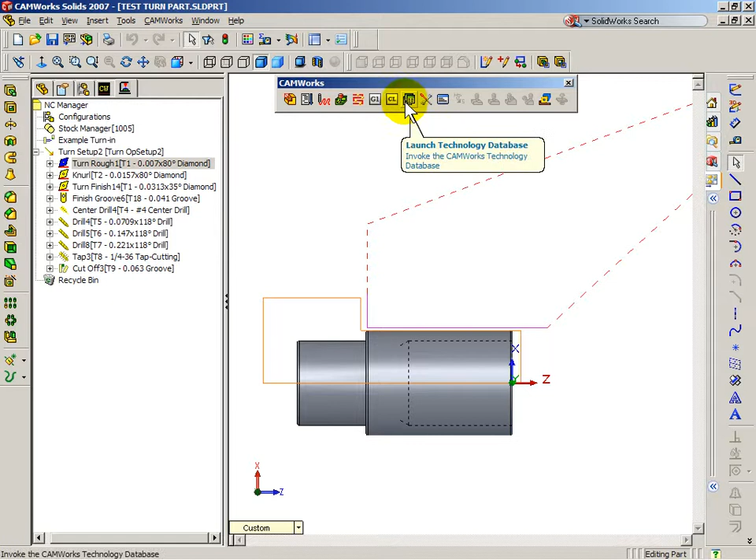The Techdb can be accessed through this icon, or you can go to the CAMWorks pull down, go on the technology database. Once we get to the technology database, we want to go to the tooling button, click on turn tooling. In the turn tooling, we have the ability to create our own inserts, our own holders.

Once we create an insert and define a holder, we can assemble them by using turn tool assemblies, which make up a turning tool. Once you make up a turning tool, you can add the turning tool to a tool crib. First, we will add an insert. So we're going to click on the insert and go to the trigon inserts.

Here's the tool page for a trigon insert. In reality, all we need to know is what is the inscribed circle and what is the radius. And we can give it a comment. In order to create one, we click on the asterisk and we type in the insert size. I'm going to put in a 375 IC with a number 1 nose radius. For a comment, we're going to actually put in a Kennametal comment for that particular insert.

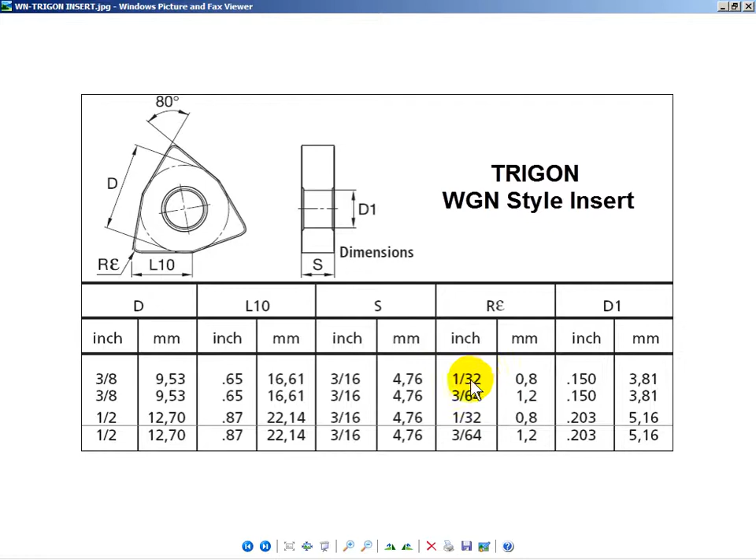Here we have an insert chart from the Kennametal company. This particular insert is a 3/8 insert with a 3/8 IC inner circle. It happens to have a 1/32 nose radius. This particular insert is a WGN insert.

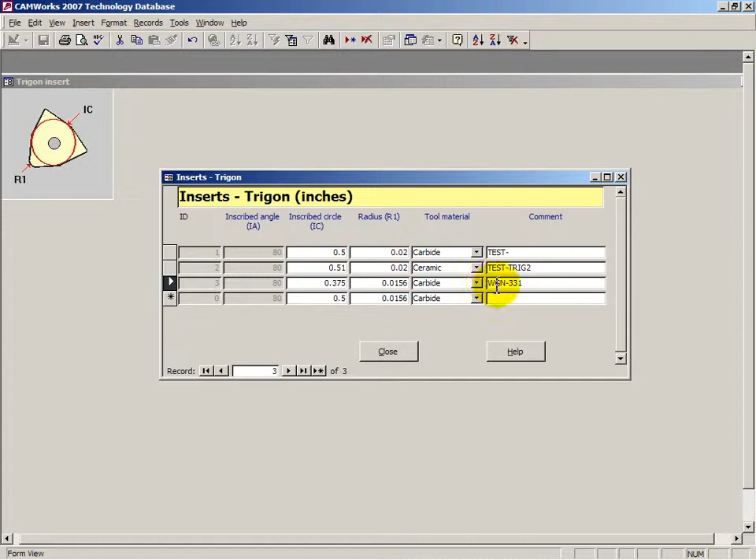Going back to the Techdb, we're going to type in WGN 331. And now before I close this, I want to make sure I click on the pencil to save this record. And click the up arrow. We've now entered an insert for the turning tools. Next, we will go into the default holder.

Once we come into the default holders, I'm going to maximize the window. And basically, if we take the first one here and use the edit and copy function, we can slide the whole way to the bottom. And we can click on the asterisk again to start a new record. Once we click on the asterisk, we can select paste. Now we can set up the proper numbers.

The lead angle is usually and normally is 5 degrees, -5 degrees. The shank width is going to be 3/4 in our case. And what I'm going to do is change this to a 4.5 inch shank length distance. In this field, this is the actual number of the Kennametal tool holder, but this is the incorrect number here displayed. I'm going to go to the chart for that number.

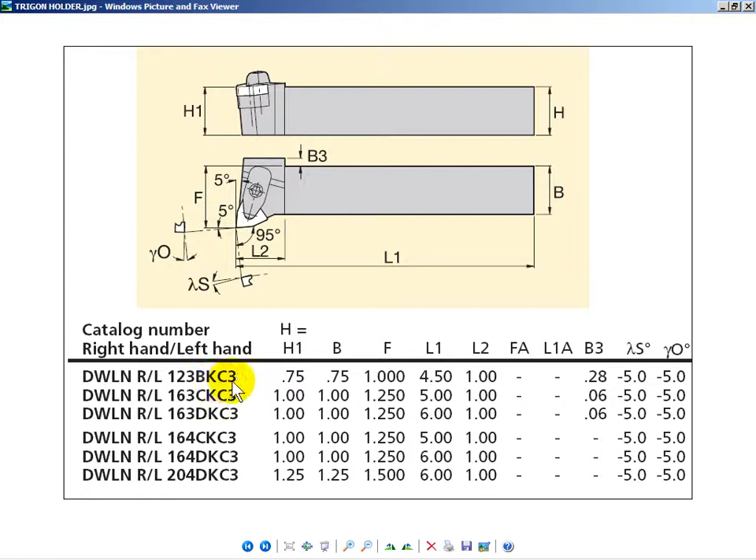Here we have the actual Kennametal chart. So the number we need is a DWLNR123BKC3. We then enter that number into this field. And we click the pencil to accept this record. We click close. Now we have entered an insert and a holder, and now we're going to go to the turn assembly and put this tool together.

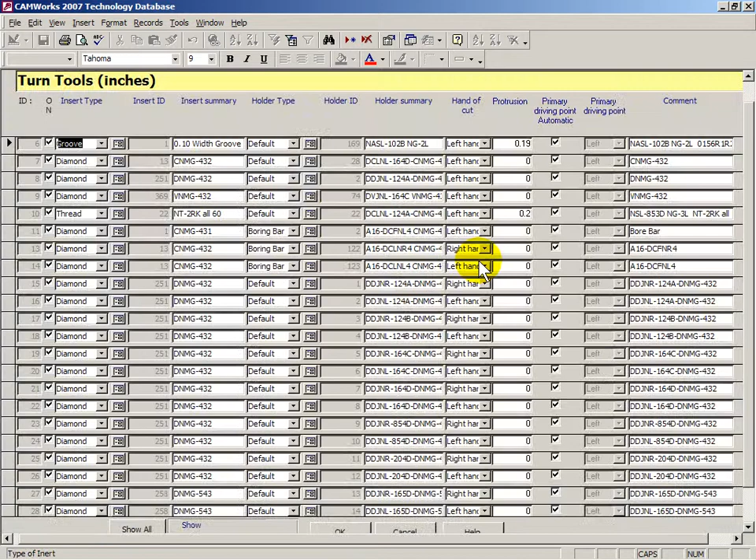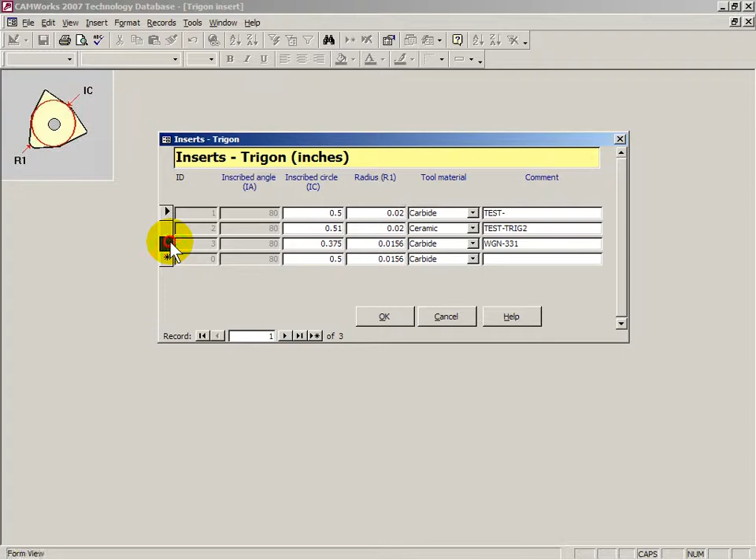We go to the turn assemblies and we maximize our window. I'm going to scroll the whole way to the bottom and add this to the bottom of the record. And I'll click on the asterisk and tell CAMWorks or the Techdb that I want to make this tool active. I want to choose a trigon shaped insert. And now I'm going to go ahead and select the insert. When I select it, the insert shows up in the insert list. Now the Trigon insert shows up in this record.

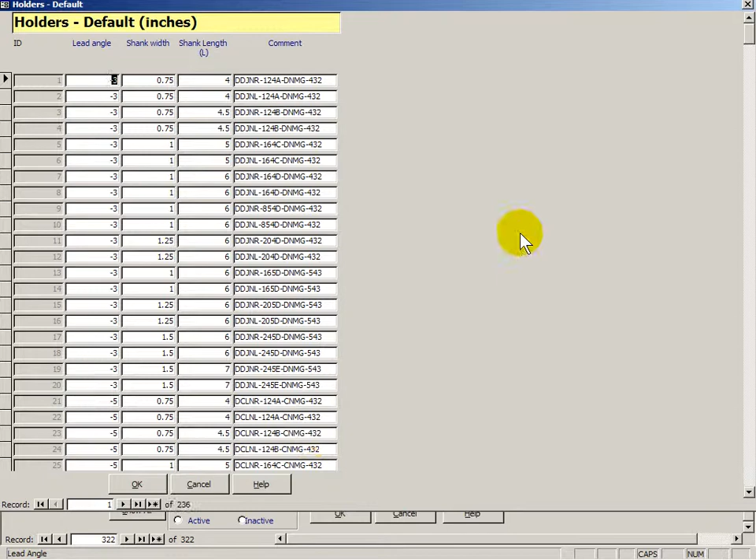The next thing we want to know is what type of holder is this? Is this a default turning holder or is it a boring bar? In our case, it's a default turning holder. When we click the holder, we can choose the holder style. Scroll to the bottom where we've added our particular holder. We click OK. Our holder shows up in this record.

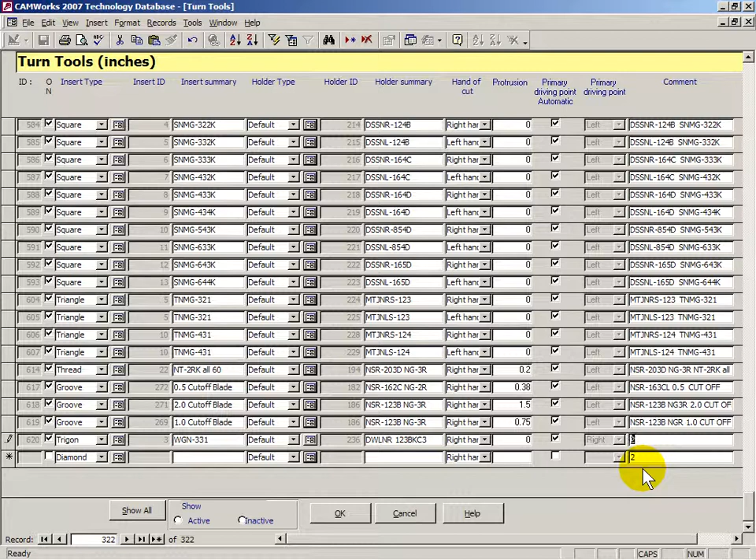And this protrusion distance is basically a distance on how far out of the holder that the insert would be protruding. We want to set that to automatic. Then we have a comment. What is this particular tool called? It's up to you what you want to call it at this point, but I'm going to call it a 3/8 Trigon tool holder.

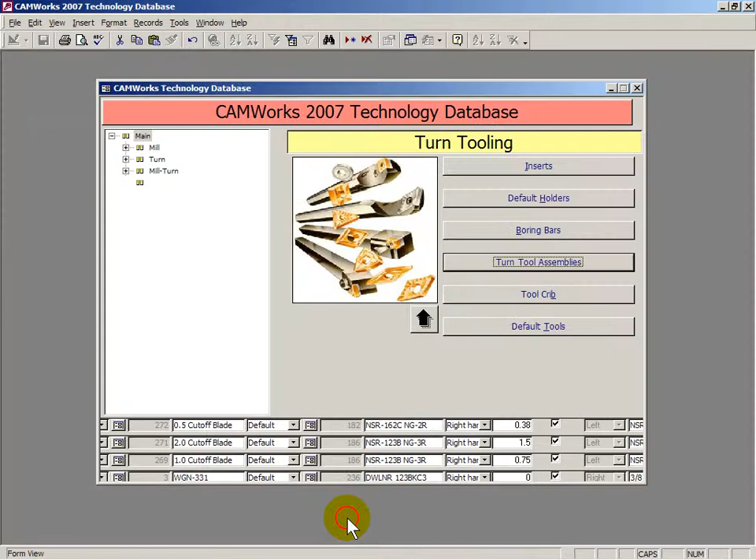Then we click on the pencil to accept this information, and we click OK. I'm going to go ahead and click Exit. Now we're back into our CamWorks part. If I want to change the tool to that new tool, all I have to do is right-click and edit definition on this operation, go to the tool page, select the tool crib, and select Add from the library.

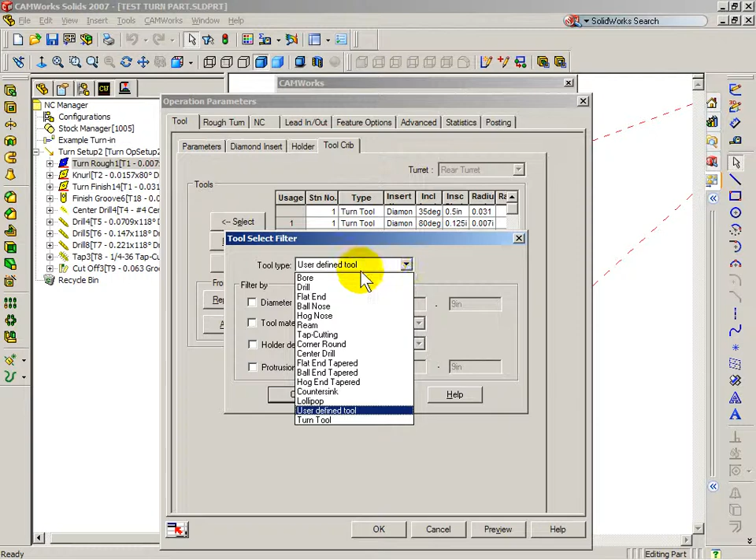We're going to pull this down and select a turn tool. We click OK. We know we've added the tool to the end of the assembly tool record. So we'll just scroll the whole way to the bottom, and here's our Trigon insert tool. We click OK, and now we look for the Trigon tool in the list. We find the tool and we select it.

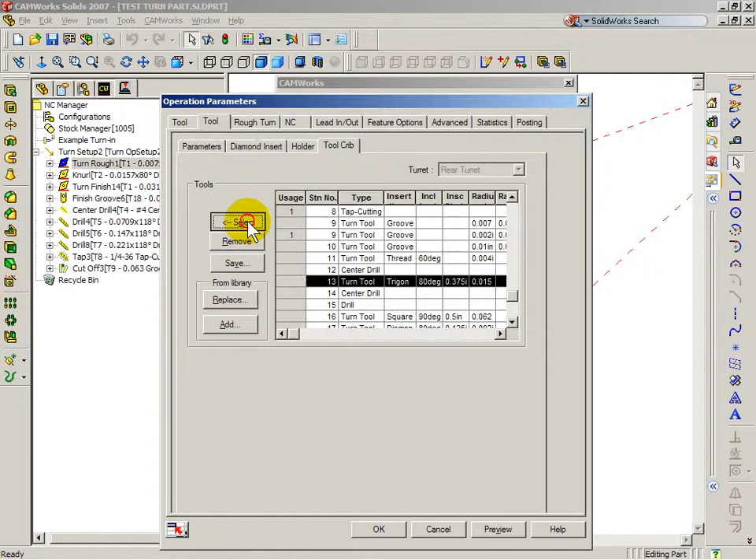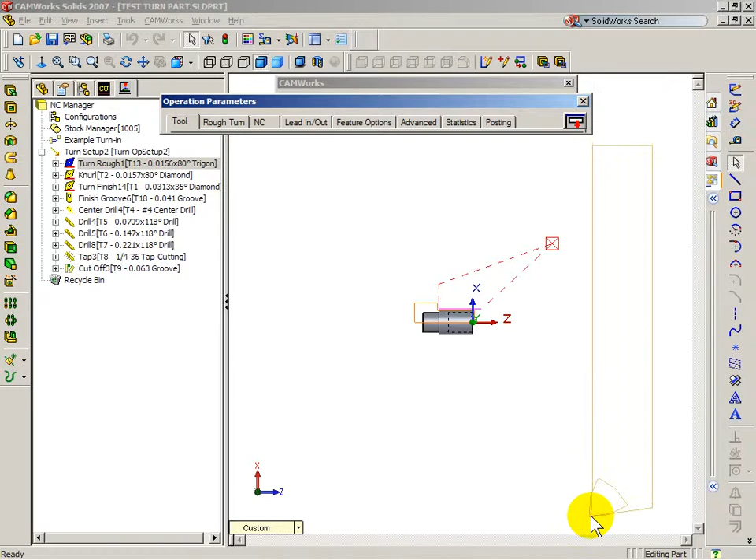Here we see the comment that was in the Techdb, the proper Trigon insert. Here's the holder and the actual name of the holder. We have this down to the left. Here you see the Trigon insert. And then we'll click on Preview. When you click on Preview, you'll see that we have the proper tool holder with the Trigon insert. If you were to do a simulation and we do a step through, now you see your Trigon tool come in and cut the part.